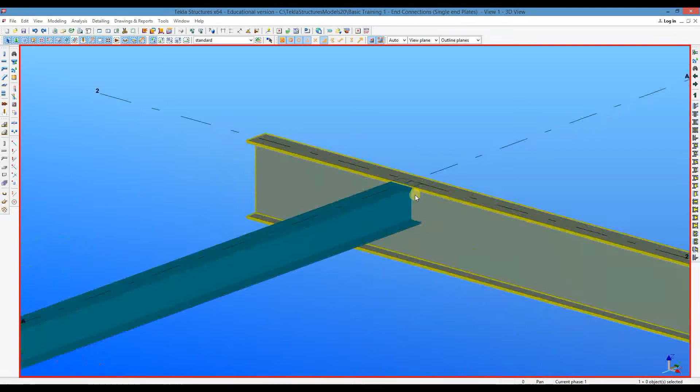Basic training: end connections. Today we will be doing single end plates, standard end connections. For all our end connections we are using end plate 144. Very simple end plate to use, a lot of different options, very customizable.

You'll notice that it looks exactly the same in the picture as the one from page 2, although the one on page 2 has significantly less options. It makes it a bit harder to customize, especially when it comes to notches and stuff. Therefore, always use page 1, end plate 144.

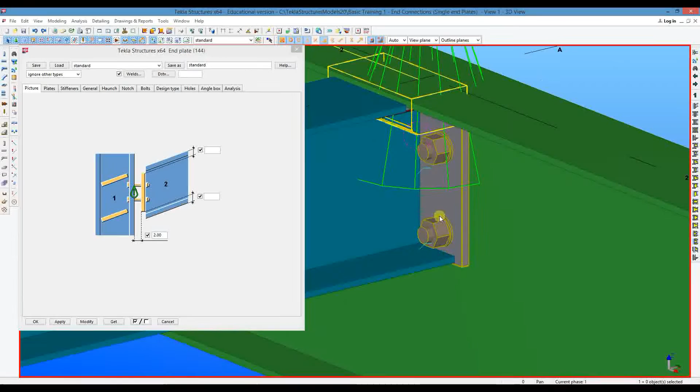Now that I've put in the first end plate, let's go look at the basic options. First options we have, of course, are on the first page of picture. Now, you've got stuff like the 2mm clearance. If you look at this from the top, just get a nice little view from the top here, make it transparent, you'll see that the plate is against the web.

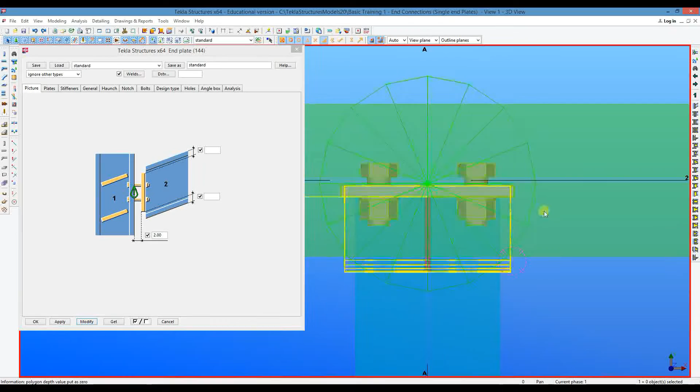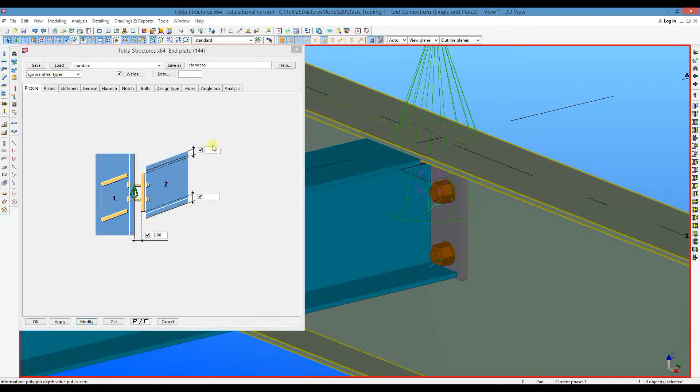Now, on average we put a 2mm clearance there, give that a bit of space to get it in there between the other beams. Okay, next we've got these two. What these do is they force the plate to be a certain distance from the top or the bottom of the steel. If I, for example, put in 40 here, then it doesn't really matter what the rest of the options say, it has to be 40 from the top.

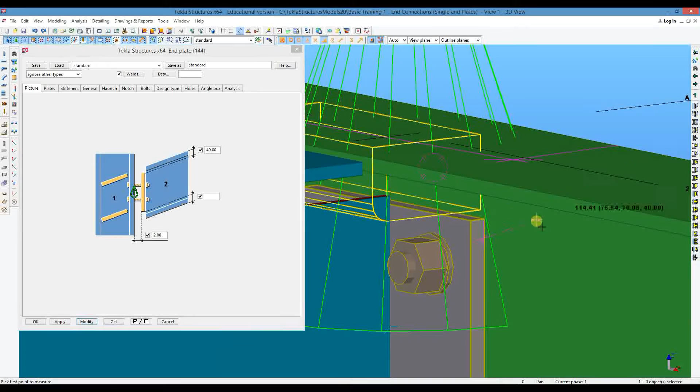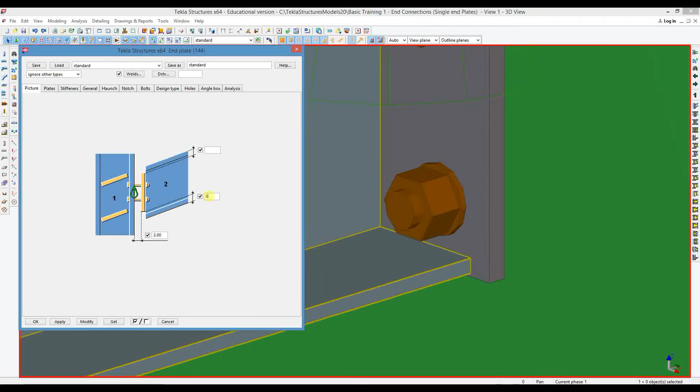Just quickly set these, make life easier. Great, so you can use these to override any other controls you want, or for example, if you do not want to work out the distance between the bottom bolt and the bottom of the beam, you can always just put your standard 6 in there and you know that it will be correct.

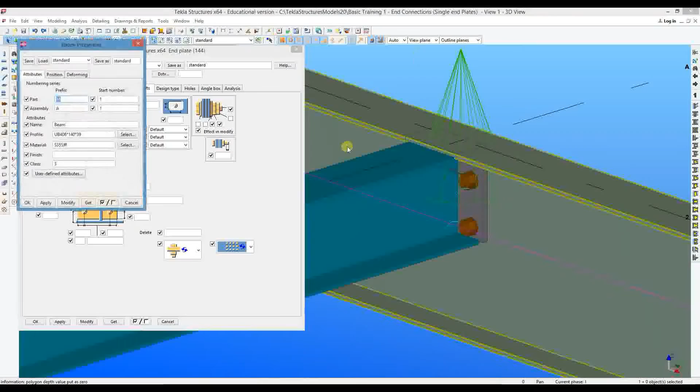Okay, as you can see there are two bolts but too far from each other. Just go back and start with bolts. Now, in a basic connection like this, where a 203 beam goes into a 406, we will be using two bolts with a distance of 70 and of course 35 from the bolt to the end of the plate. That gives us our standard end connection.

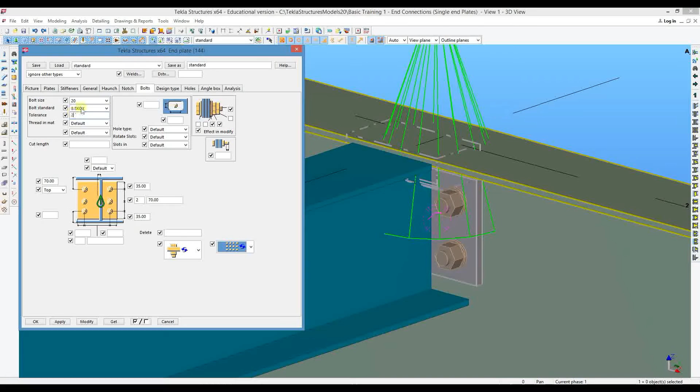Now, default settings, usually your bolt size is M20, but just to make sure that you do have the stuff correct, I would suggest to always fill in these. Make sure your bolt is the size you want it to be with the standard and the tolerance.

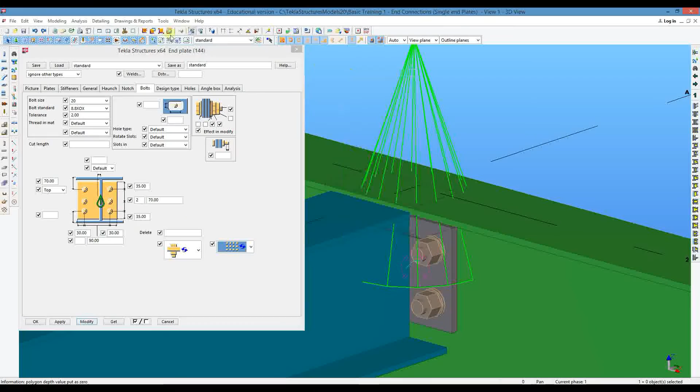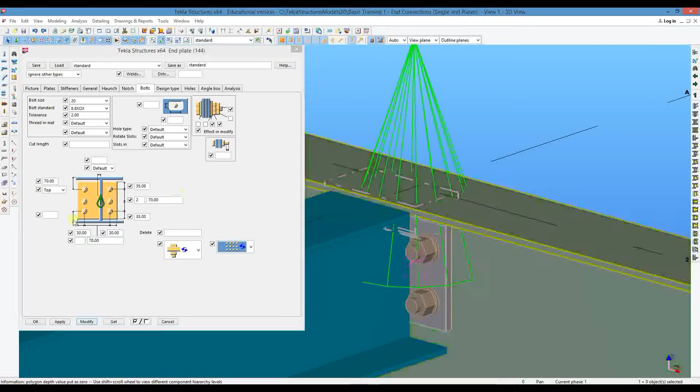Next, of course, is your cross centers. Now, the most used one will be a 90 cross centers with 30 to the sides. This will give you a plate with the width of 150. That's a standard end plate size. Good to use. It comes in flat bar, easier to fabricate. The other standard you will be using is a 70 cross centers, but that's usually only if it goes into a narrower flange, columns or stuff. Okay, so let's put that back on 90.

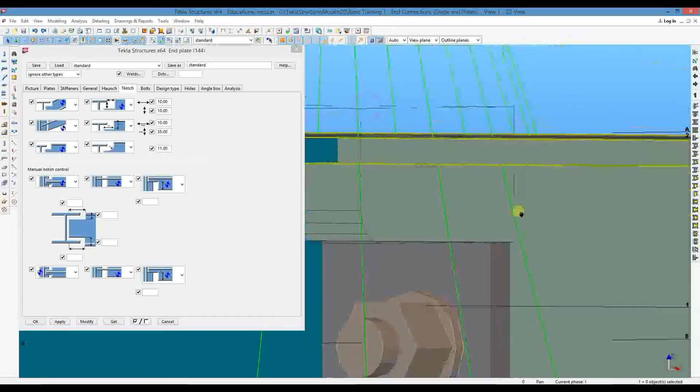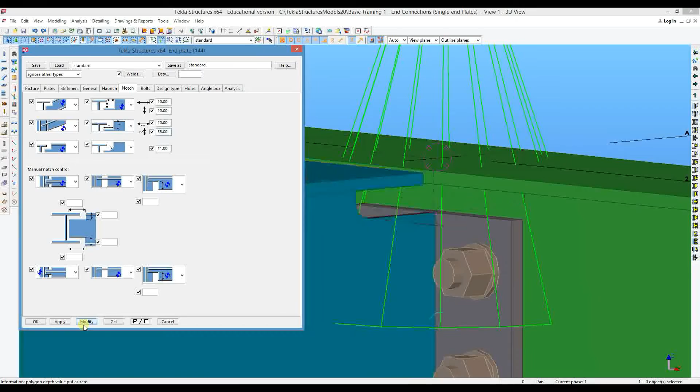Right. Next thing is the notch. Now, as you can see here, end plate 144 already has the notch parameters filled out. Makes it very easy to work with. We've got the 10 clearance up here, the 35 depth over here. Sometimes you will have to make this smaller to 25, it depends on the model you're working on. They usually tell you or give you some indication on what they need. The notch can also be used for other stuff, but we'll come to that a bit later.

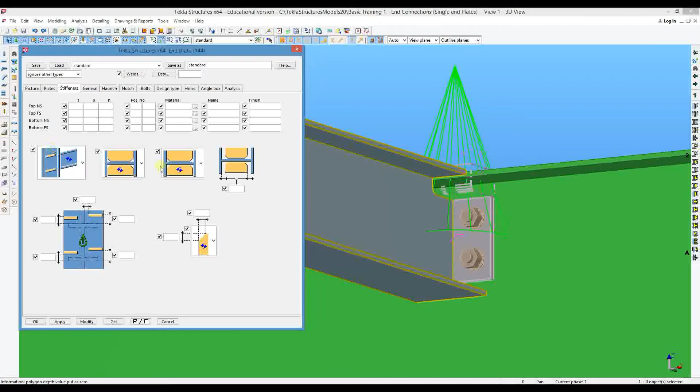Now, let's go to haunch. You can, if needed, have extra plates at the top and at the bottom. I will also show this a bit later. Let's see, stiffeners. Doesn't apply to this one. And then, of course, plates. Plates, you'll be using a 10 thick plate. Remember that you will need to fill in the part marks to make sure that this mark here is correct.

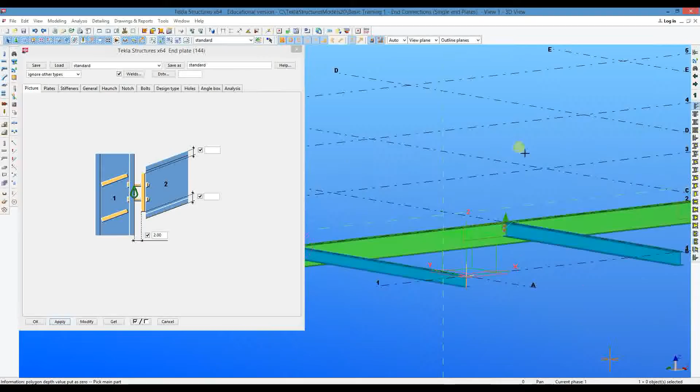Okay. Once you've set up your settings, you can apply them, and to make life easy, just put them on all the other ones. I'm doing an area selection. There, it's been applied to all of them at the same time. Problem is, I don't want them all to be the same 2 bolts.

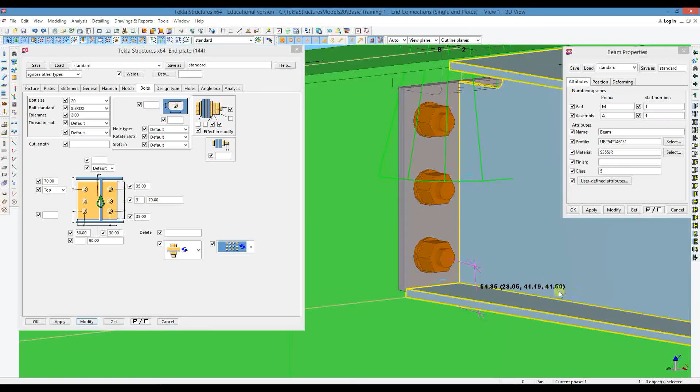I've got a variety of sizes here. 254, it's also 2 bolts. If you make it 3, you can see that the bottom bolt is too close. If you go and measure, you'll also see that it's less than the minimum recommended, and therefore it's only 2 bolts.

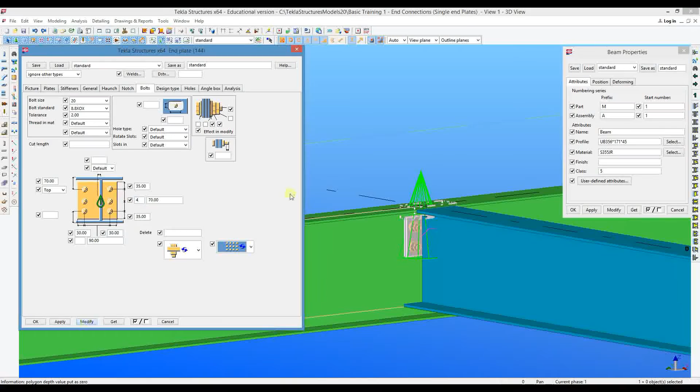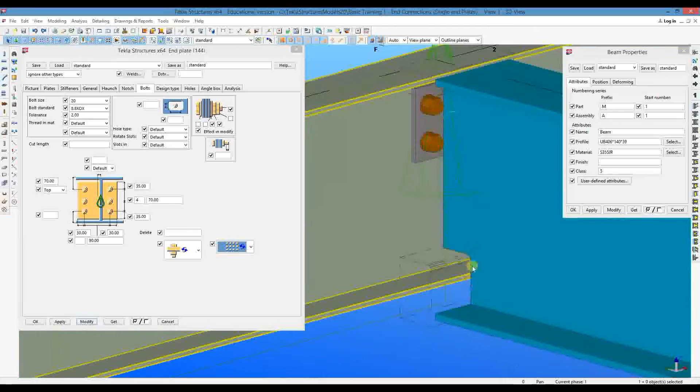The 305 is 3 bolts. The 356 is 4 bolts. And the 406 is 4 bolts. Now, as you can see here, I made these two the same size. If you look here at the bottom, you'll notice that it notches there as well. And the exact same thing if it's a lot bigger.

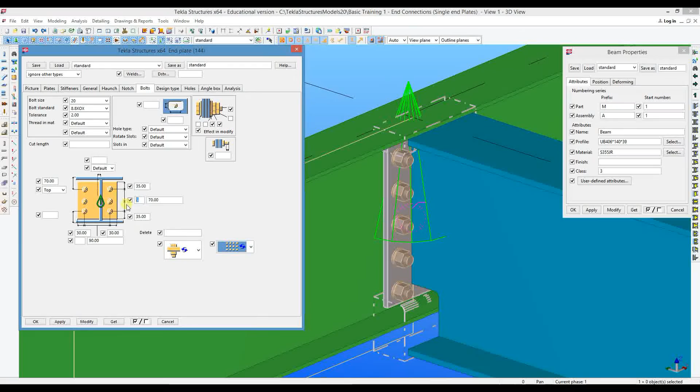Now, a 457 usually requires 5 bolts to be correct, but because it goes into a smaller member, you have to use that member's size to determine the amount of bolts. Now, a connection like this is not very strong. Your beam is not at its full strength. It cannot bear as much as it should, load wise, that's weight.

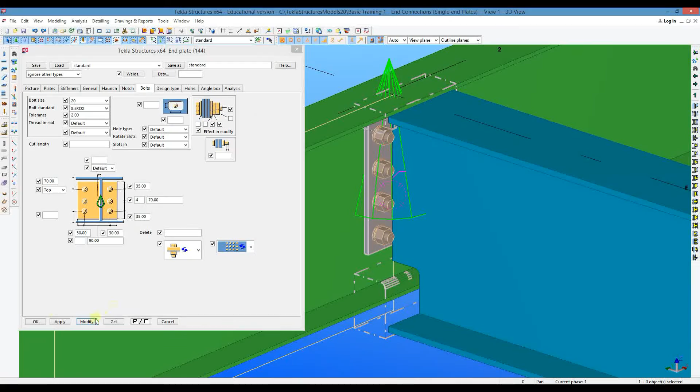But it does happen sometimes that the engineer does this. Usually shouldn't be done, but if they do want it, do remember that the maximum amount of bolts is according to the smaller member, in this case the one that it goes into.

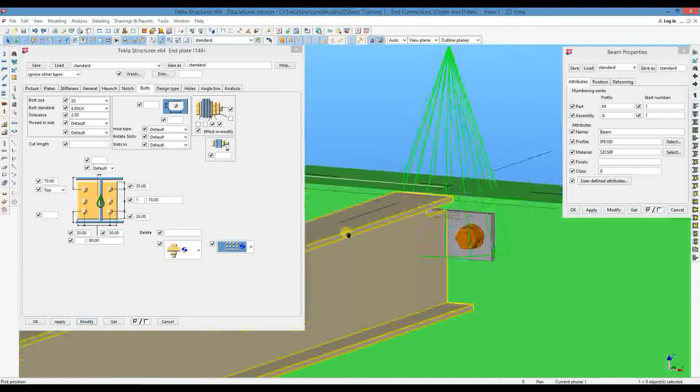Now, you'll sometimes get these IPE. IPEs, if you look, they're just above the standard beams. They're basically a very light version of the beams. Now, because they're small, they usually only require 1 set of bolts for the 180. Standard 2 for the 200 IPE.

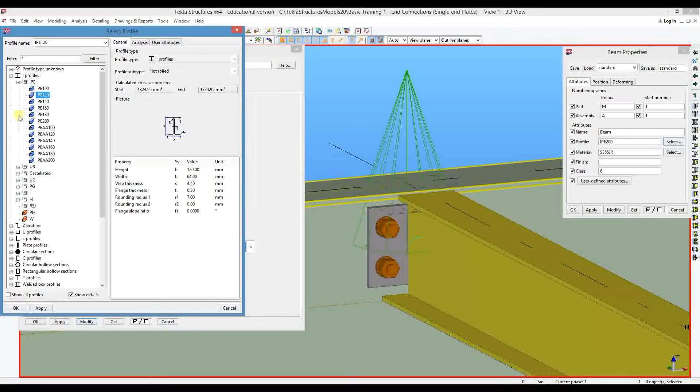Do note, if you do get something like a 140 or 100 IPE, 140 is still fine with 1 set at 70. 120, it's 1 at 60 down, and of course the 100 is 1 at 50 down. So for those very small ones, it's 1 bolt, 50 down. Basically the 2 smallest ones, it's just 1 in the center.

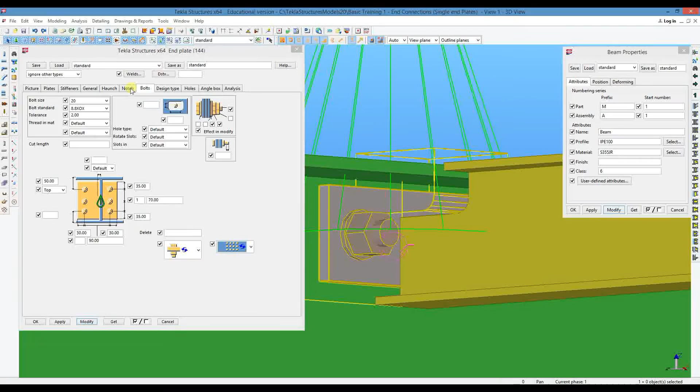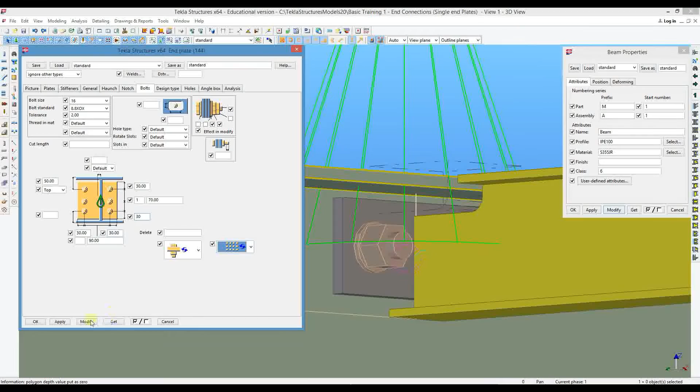As you can see, the notch is way too big for this size. Normally on something like this, you will have to use a smaller notch to get it to work. This is 16, this is the smallest it can go. And of course, because it is small, your bolt size and your edge distances will decrease with everything else. I think this one's 30 and 30.

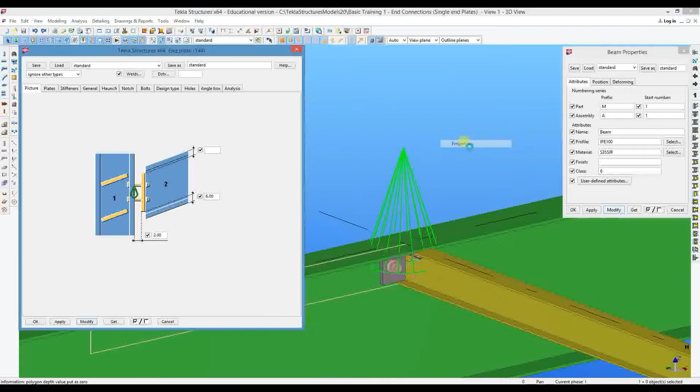To make up for that lack of strength, it's always best to make this bottom full size so that it's got enough welding space. Okay, that's it for that odd one. Let's go back to a nice normal set of settings.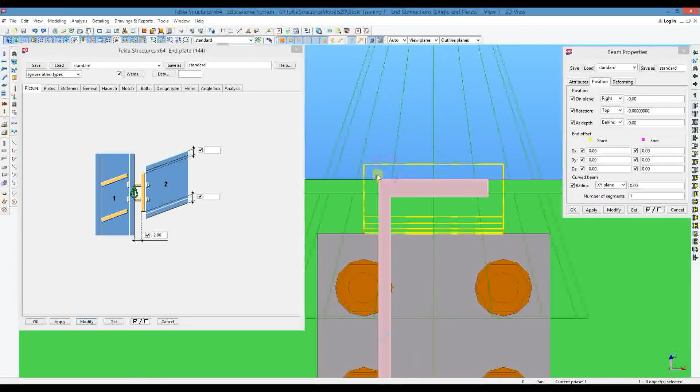Now, next important part here is channels. You'll notice that my channel is no longer in the center but on its back. The channel's back is usually the same as a beam's center, and your stuff will be done according to the back of the channel. Unfortunately, the connections aren't really that smart to know that it's a channel. It still works it out from the center.

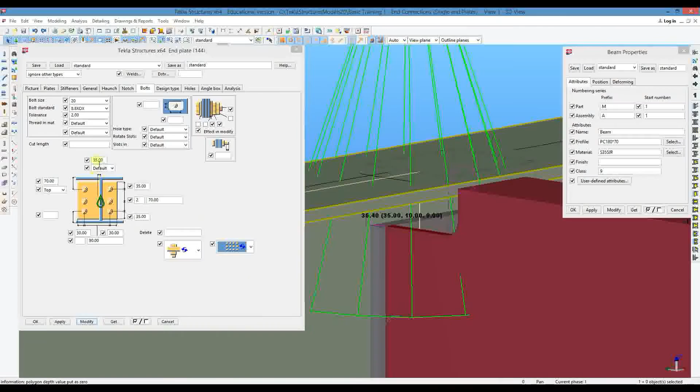So what you need to do is either take a measurement from the middle of the plate, which is there, to the back of the channel, which gives you a measurement of 35, or if you look at the section size, it'll be half of the width. So the 70, that's 35. Now, if you go to bolts, you can just put the 35 in here. It's either a plus or a minus. It all depends on which side of the channel it happens.

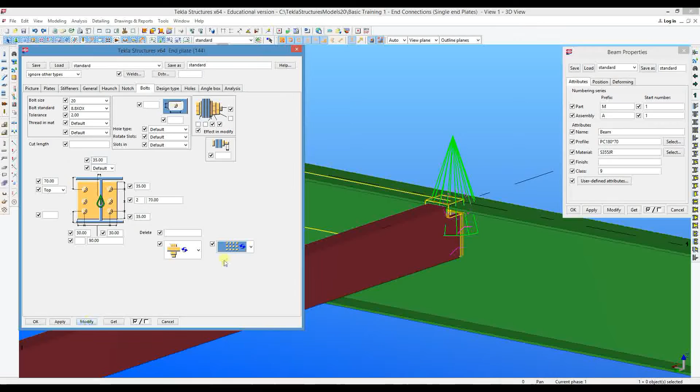For example, even though it's minus on the one side, it will be positive on the other side. So always take that into account. One will be negative, one will be positive. It depends on the side of the channel.

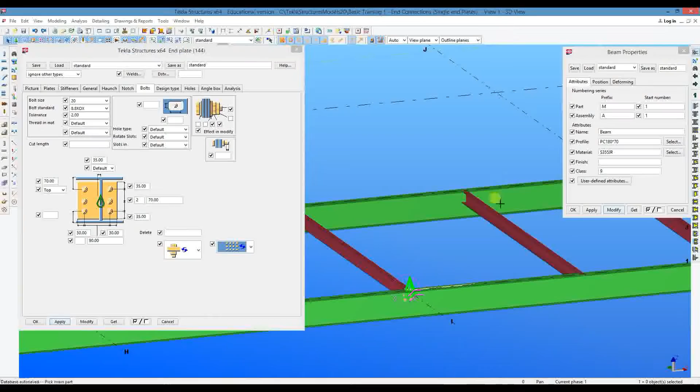As you can see here, the yellow point indicates the start, the magenta point indicates the end of the beam. Doesn't matter what the channel is, if you put it in, those 2 points will be determining exactly which one's which. So the start point, which is now this side, will be the positive, and of course the end point is the negative.

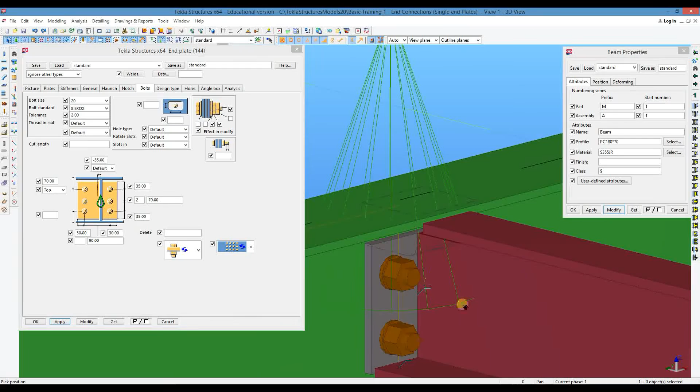Very easy to remember. It doesn't matter if you don't remember it. I usually don't care. I just put in a positive, and if it doesn't work, change it to the negative. Okay, now, as I was saying before, on a 180 size, do remember it only requires one set of bolts. It's only from the 200 and up that 2 sets are required.

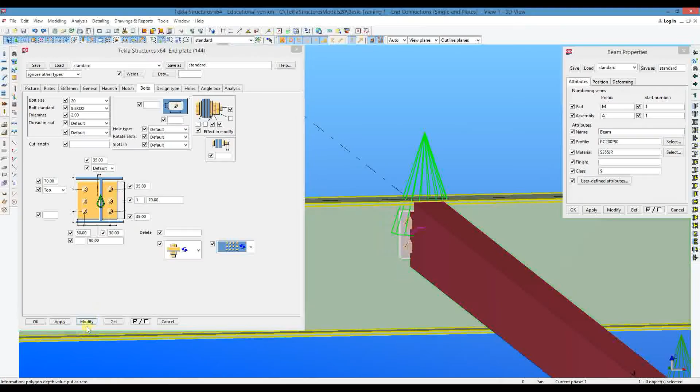Okay, now let's go and have a look at something that bolts into a column.

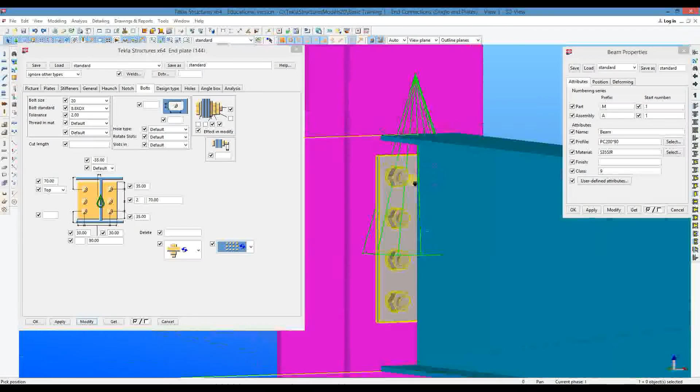The same principle applies. Very easy. You will of course use the column's width in order to determine the size across centres. If your beam goes into something that's a wee bit more narrow, something like this, a 90 will no longer suffice, and you will have to go smaller. That exact amount is of course determined by your red book, and you'll be able to find all the right information there.

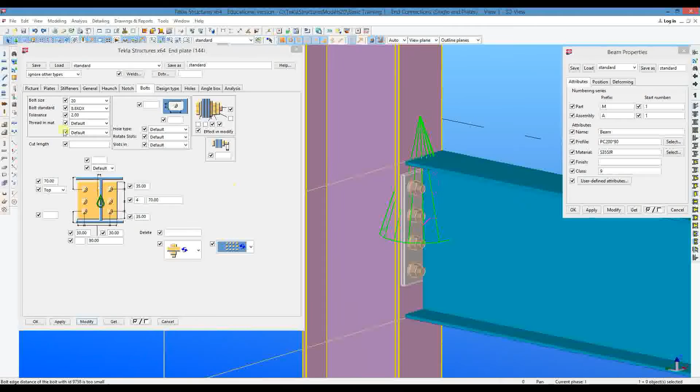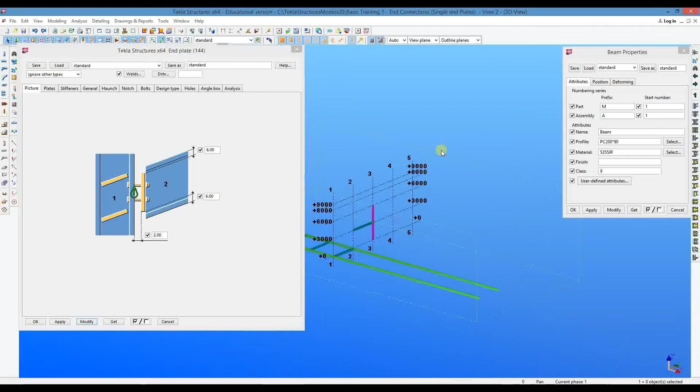Okay, now normally on these main beams that go into the columns, you also want to make your plate full size. This makes it a bit stronger. Uses more plate though, but it can't be helped. Now, a big problem that often occurs is sometimes you need to put bracings in, and for that you need to lengthen your plate. So to demonstrate that, I'm just quickly going to put something in.

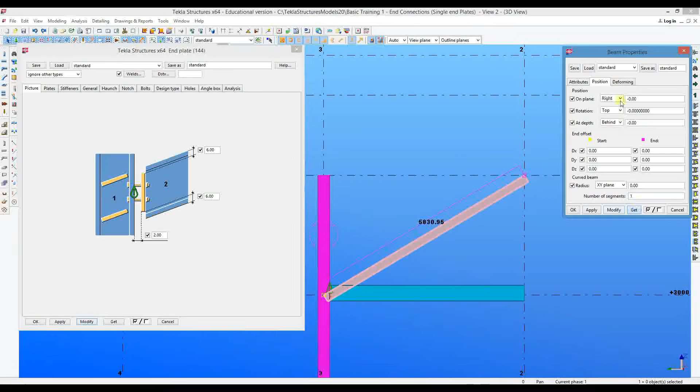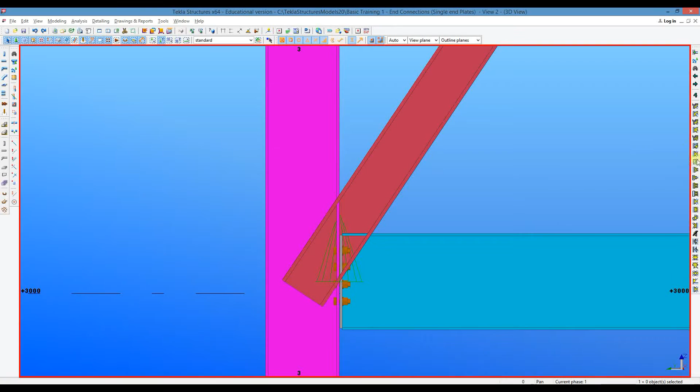Let's see, channel will be fine. Just move this to... influencing the plate, so make the edge a bit sharper. There you go. It has to connect to both. In such a case, we just get to the connection. In such a case, normally the gusset gets cut according to its bracing, just there.

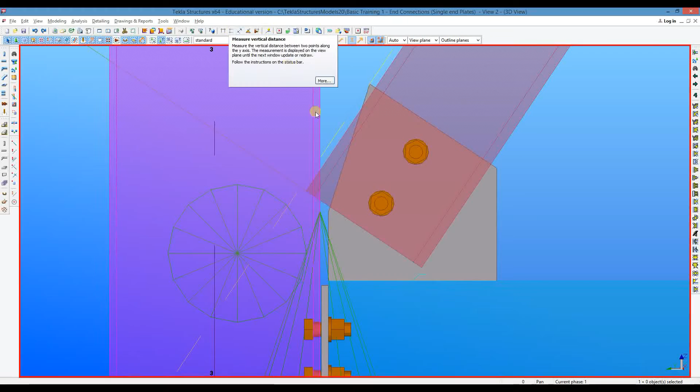And in this case, that means I'll have to move this out, and the end plate will have to be extended by 196.66. We're just going to round that down. Firstly, let's increase the clearance to get it out of the plate's way. This should be enough. Nope.

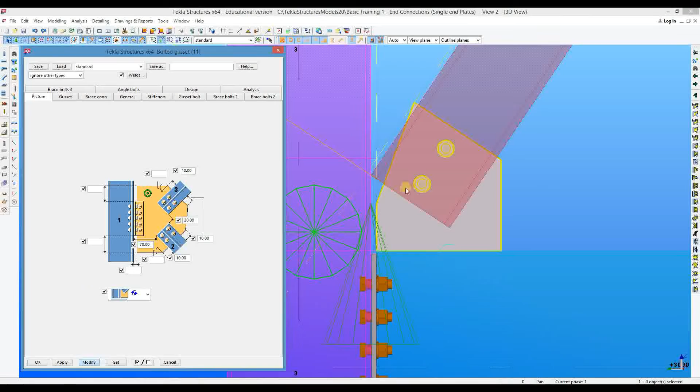Okay, now let's go to our plate's shape. Remember, this is best if it's left on blank, gives the program a choice on what to do itself. If you wish to determine it, then you can measure and put in what you believe is correct. I'm going to round this down to 197. No reason to use fragmented numbers.

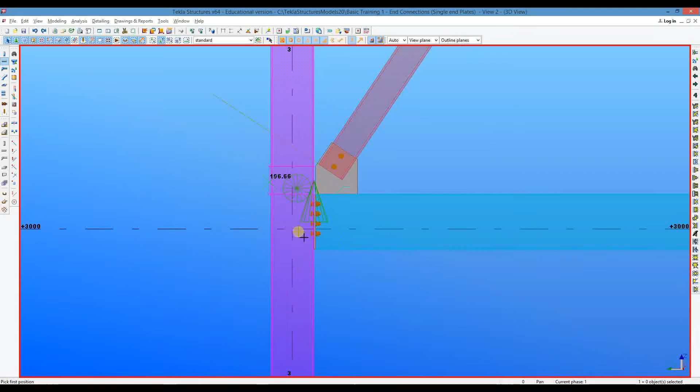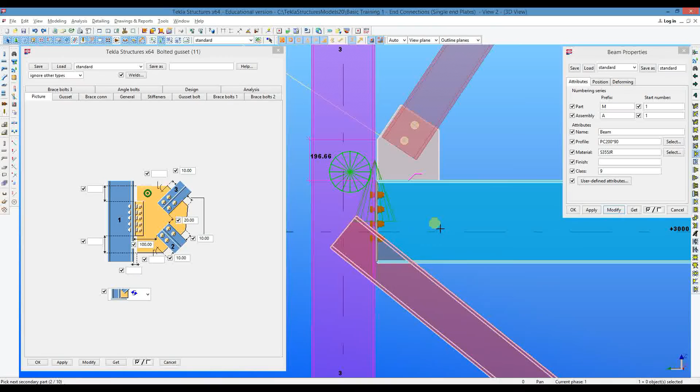Now, when you've got a situation like this, either at the top or at the bottom, let's make the situation at the bottom as well. I'm going to make this a wee bit smaller, but easier. And then of course, I have to remember to change whatever settings required, especially this here. Let's leave this blank, make it a square. Alright, now back to the plate.

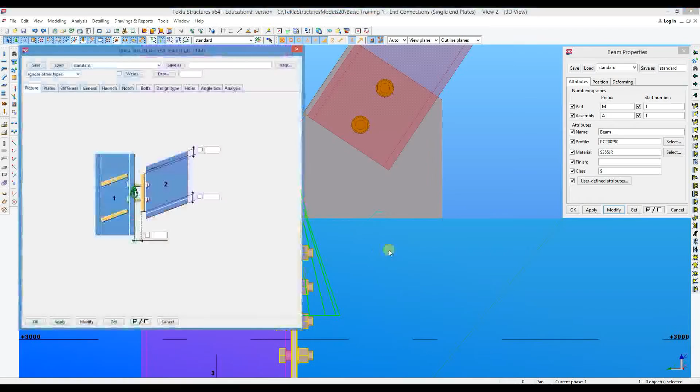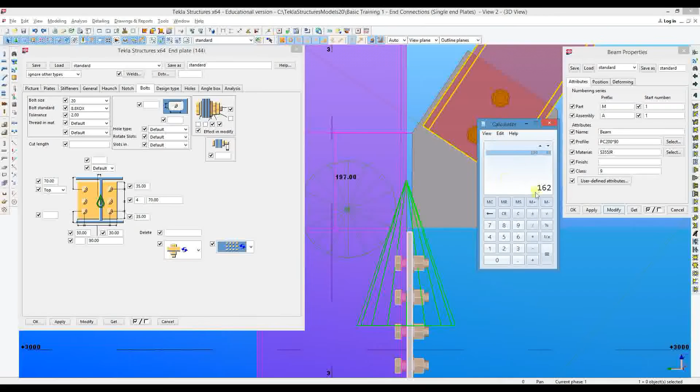When having a situation like this, normally you would take your measurement from the top to the top of steel. From that you will deduct your 35 at the top. Let's just open up the calculator here, make this easy. Gives us 162. So my bolt is going to be minus 162 up. That's the first bolt here. I'll need to remove these two sixes because I want my bolt to determine the size of my plate.

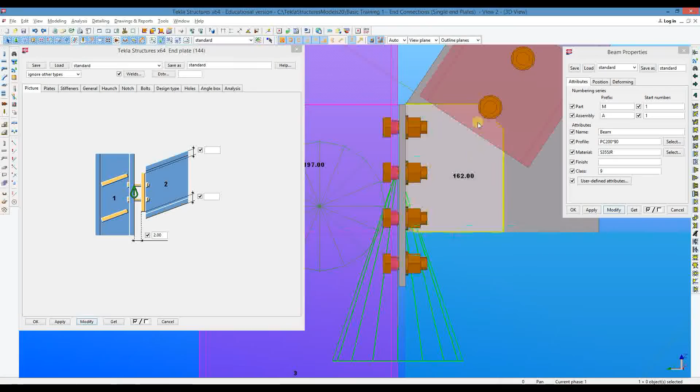Now, from here to the top of steel, I've got 162. I also have this extra plate here. Now, this is the haunch plate that I mentioned earlier. You can turn it off for now. It's not required for this specific connection. And indeed it is in the way.

Now, let's say I want to leave this at 70, 92. That makes it, well, the easiest choice. Other choice, of course, would be to take this number, divide it in 2, see what I get. If it's more than 55 and less than 110, then it's fine. Try and work with even rounded numbers. It's going to make your life a lot easier in the long run.

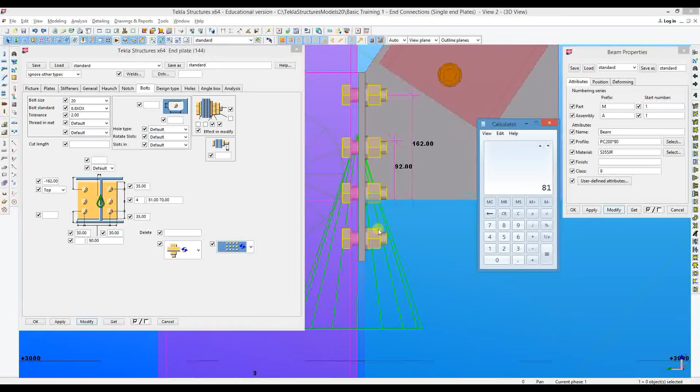Okay, now that gives us that for the second bolt. Now unfortunately the third bolt will not be inside the flange here, so it's not going to be another 81 down. For this bolt it's going to be 81 plus 70. That's our standard from the top distance. It's 151.

So next bolt is 151. Modify. There we go, and then from there we can continue on with normal bolts. Just going to put in a bunch here. See what I require. So 4 is 6, 6 bolts there.

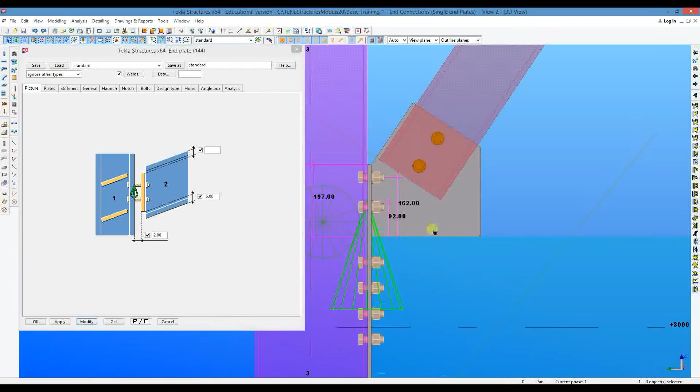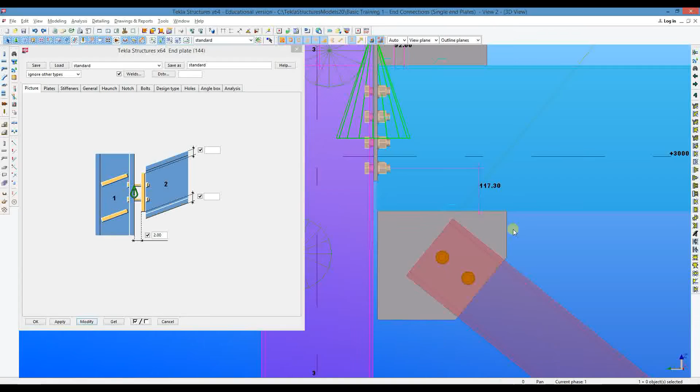Now, if this was it, I'd have just closed this off at the bottom with a 6, and that would have been my connection. Now, since it's got a bracing at the bottom as well, we will need to extend this plate even further down. You have to remove this 6 so it's not in the way. Then take a measurement from the bottom bolt to the bottom of your beam. There you have to add 55. That is your standard length from your bottom of the beam to your first bolt at the lower end.

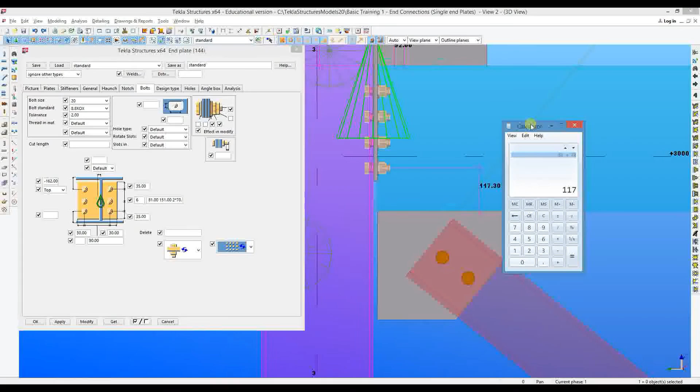So that means my next length here is going to be 117.3 plus 55. So let's see, because the calculator is much easier. 117 plus 55 gives us 172. 172 plus 3, no, 0.3 modified.

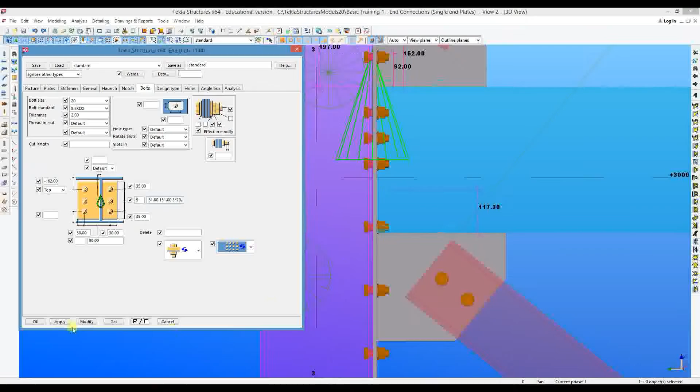Okay. Now, firstly, I'm going to go back up to a higher amount of bolts. Now, I said here it's 2 bolts at 70, but in actual case, this one will be 3. So 1, 2, 3, great. And it's that one. From there, let's say it's 70 again. Looks good.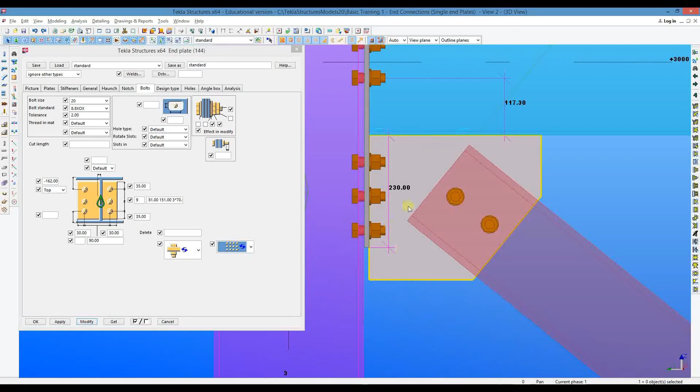Now, usually you don't keep this one square. You can do the measurement, figure out the exact distance and all that. It's normally just easier to work according to what you set your beam as. Nice round number. It is still shaped. It's not as shaped as it could be, and it fits in nicely. Okay, that's that for this column. Let's put this over to the other side.

Now, sometimes you'll get a standard end plate with a bit of a change to it. They want an extra bolt at the top and the bottom with stiffeners because there's going to be a lot of motion or torque on the structure that's going to cause it to vibrate or bend or move, whatever the case may be.

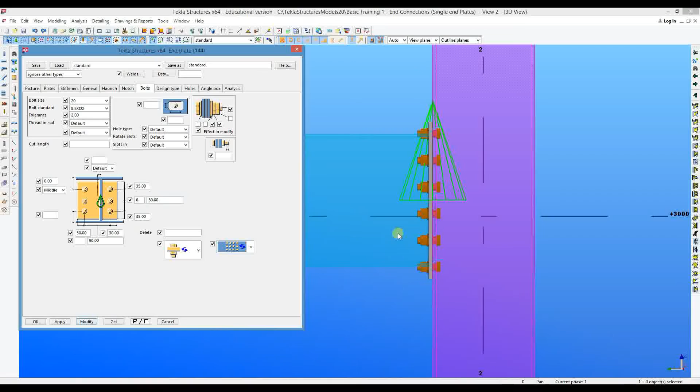For something like this, I'm just going to say let's make this 0 from the middle. Going to require 6 bolts, and I'm going to make them 150. Here, see where we get at 80. Good. So let's say 120. 3 at 80. And 120. Now, normally they will give you these types of dimensions. In this case, I'm just sucking something out of my thumb. Doesn't really matter what the distances are.

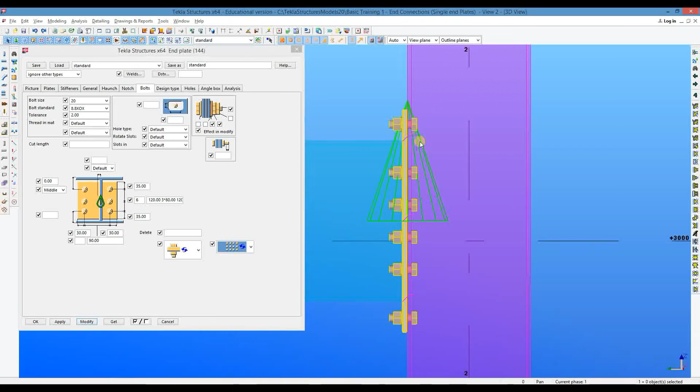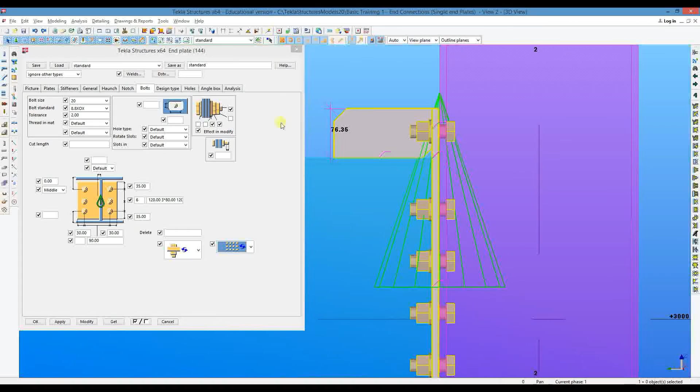If you look at something like this, in this case, you will want to have these extra plates here. Now, if they give you a length, great. If not, you might have to work it out. Stuff like this is normally, say, triangular, so the same amount up as it is sideways. In order to get that, let me just put the thicknesses in. This is 76, 76. I'm going to make all of these numbers 76. You remember to put in your marks.

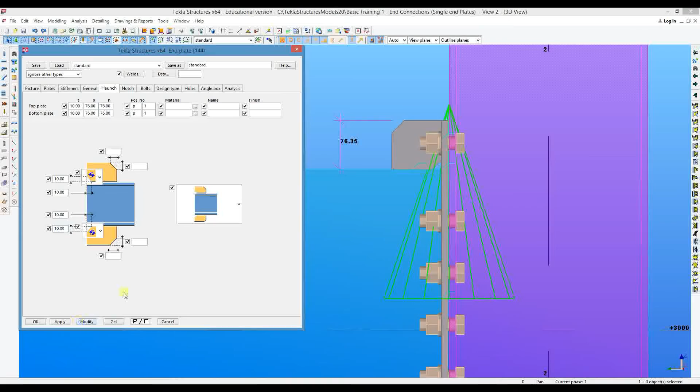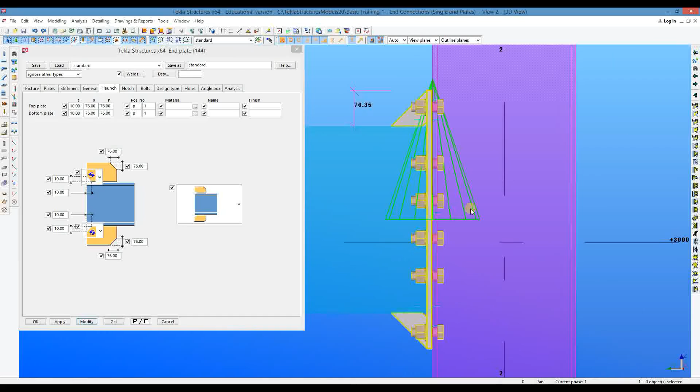That gives us that. Now the inside, normally you keep it about 10, 15. It changes usually, but that's just to give the welding on the end plate some clearance. Makes it easier to fix the stuff. And then for the top, it's also going to be 76. What this does is it forces this plate to become triangular. Of course the corners are cut off, but very simple, easy to do.

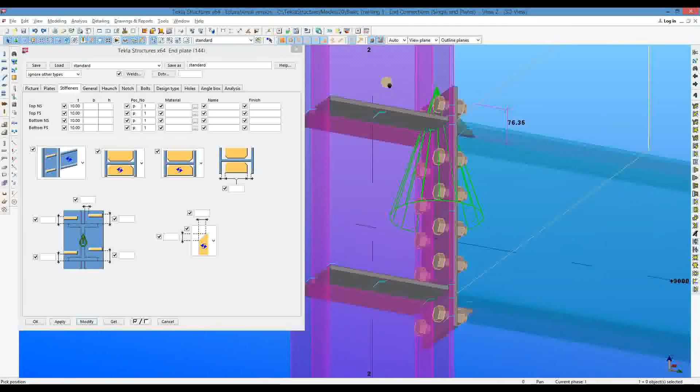Same thing with the stiffeners. As soon as you put in a thickness, it will put in stiffener plates. There we go. Got some nice stiffeners here. Of course, you can control the width of these stiffeners, and you can do them individually. Have one side something and the other side something else. For example, you can put this far side at 0 and leave that stiffener out completely. Very customizable, easy to change, a lot of settings you can play with here.

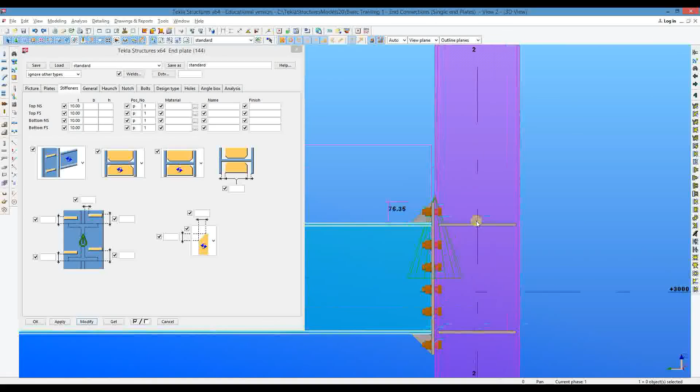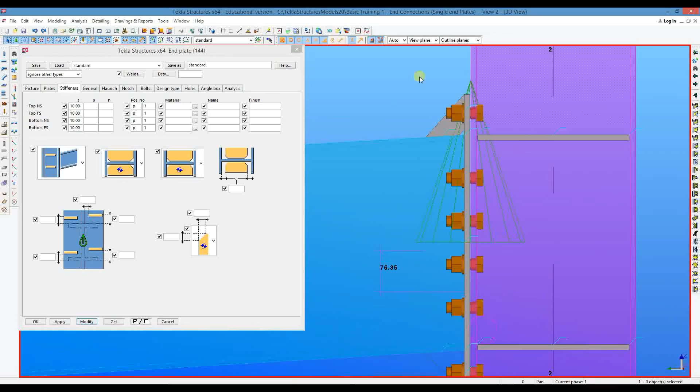Another interesting setting is in the case of a sloping member. Let's just slope this member. This will of course require me to redo these small ones, but if you look here, stiffeners usually don't go at an angle. Try and put them straight, it's easier to make and to draw.

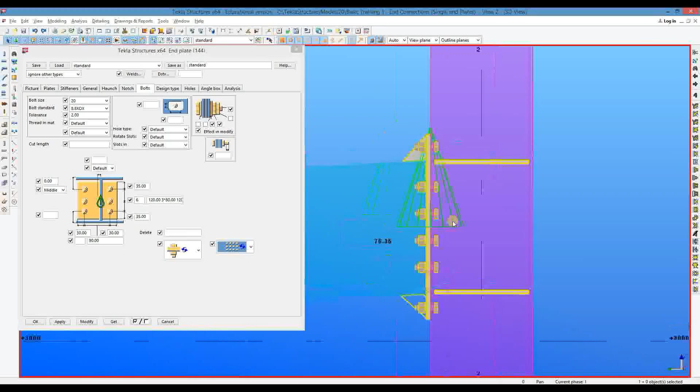There's a lot more settings you can play with. Same on plates, haunch, notch. So there is a bunch of stuff that you can change if you want to. It's fairly simple. I would suggest playing around with it for a bit, just to get the hang of it. See what settings do what. Let's say notch it, notch it.

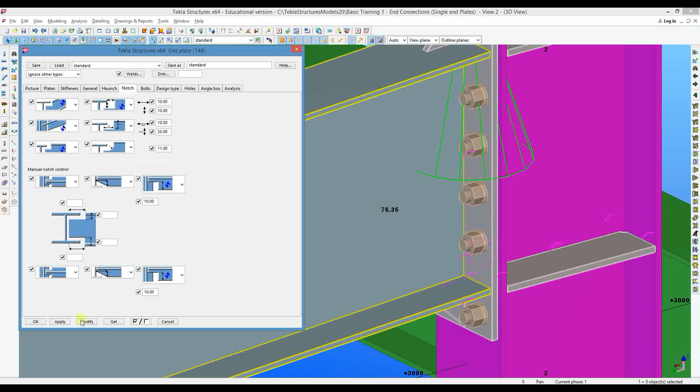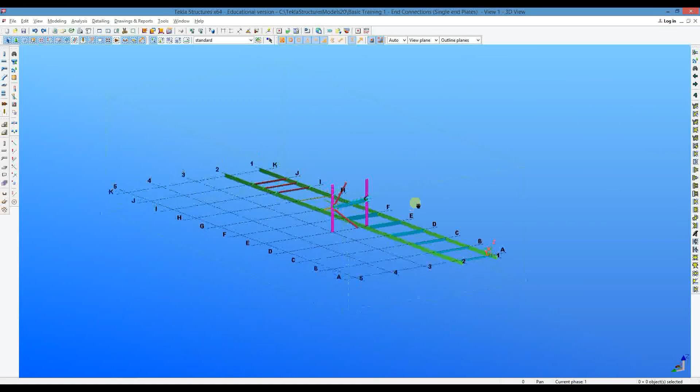These usually require it to go into something else or have some sort of intrusion. This stuff will be more or less with the double end plates. That we will be doing on the next video. Okay, now I think that should be it for this.